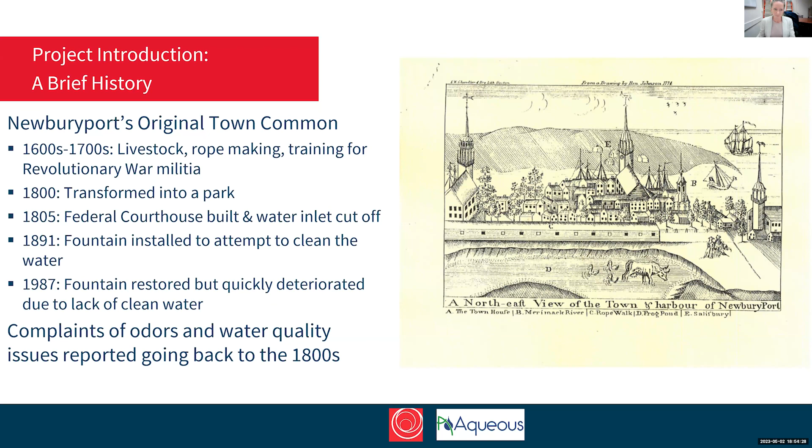In the early 1900s, after the courthouse was constructed, renowned landscape architect Charles Eliot was hired by the city of Newburyport to design the park. He had a sort of overall vision for the park, which included a protective granite edge, meticulously sloped lawn, circulation of the water via the fountain, water and high branch trees that would frame the beauty of the space with no flowering plants of any type. And he also had a vision to complete the northwest corner of the slope.

Some of his vision was realized, but many pieces, including the granite edge and the northwest corner grading, were never fully realized due to the cost. And also the water quality continued to remain a problem, both due to cost and really the lack of technology to remedy the problem of the water quality long-term.

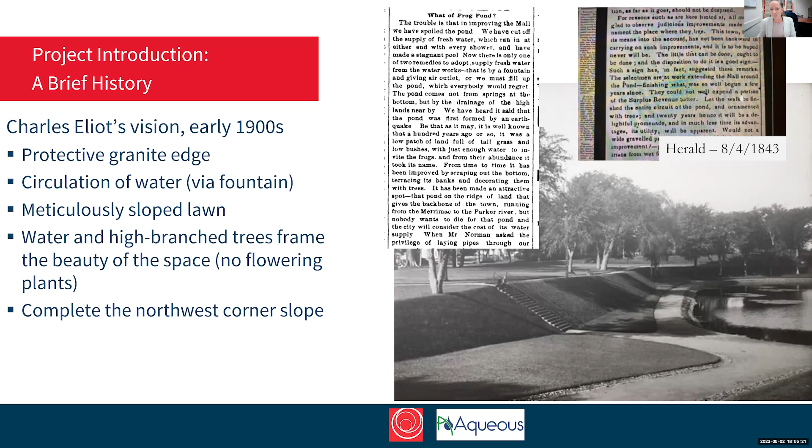Next slide, please. So we're at a really critical moment in this project right now. This is a complex project. It has many pieces that must be carefully orchestrated. This water quality problem demands a unique solution, and we think we have the right team to do that today. We also, for the first time, have funding in place to finally complete this project using bonding against future allocations of the CPA to the tune of almost $3 million.

We have political and public support that are building, and we have a lot of momentum to get this project done. The water quality here is at a critically dangerous ecological point. We've experienced increased harmful algal blooms over the years. We know the pond is stagnant and toxic, and it's certainly not the kind of place that we want to be at the heart of our city. Next slide, please.

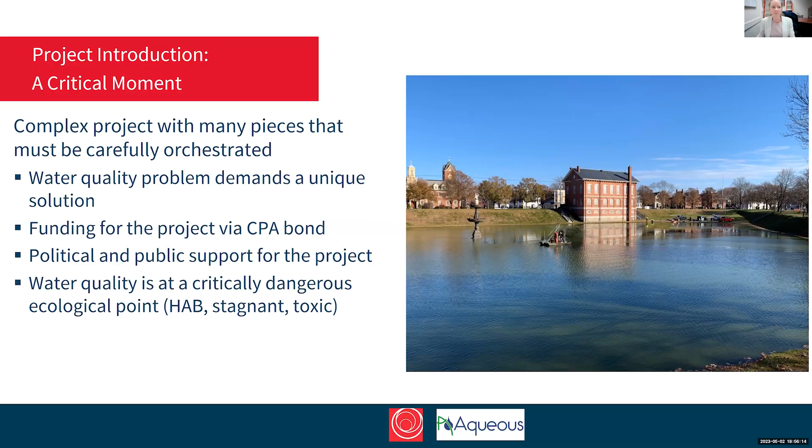And before I pass this off to GEI, I just wanted to put this slide up. I had mentioned earlier that this has been a priority project for the Parks Commission for the better part of a decade. This is the conceptual idea that the commission has for the overall vision of the park. This is not being proposed tonight, but this sort of gives you an idea of what their vision is for maybe down the line.

And so I'll just leave this slide up for a moment if you want to take a quick look, especially at sort of the elliptical boardwalk behind the courthouse. That's not being proposed tonight, but this is something that the Parks Commission has been mulling over.

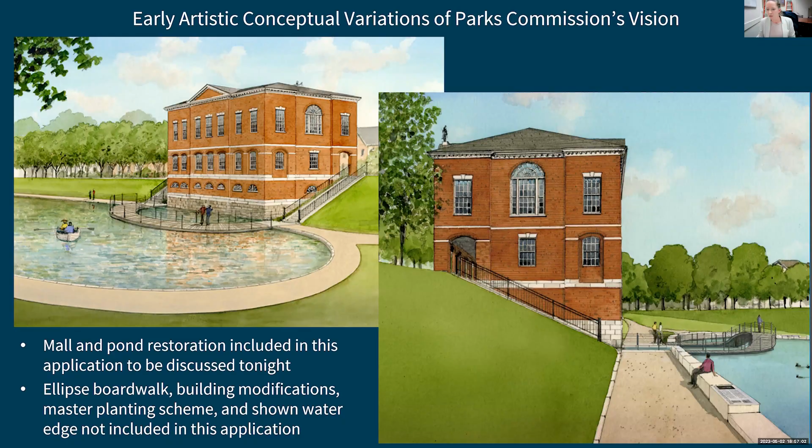And from that, I'm going to turn this over to GEI and Aqueous if you want to change slides, and I'm going to hand it off to Mike Sibilis, I believe. Actually, I'm going to snag it. Oh, sorry, Kim. Krista. Yeah. Sorry about that. No worries.

So as Kim mentioned, I'm Krista Wolf. I'm from GEI Consultants, and over the next handful of slides, I'm going to reiterate the current conditions that Kim described at the pond. I'm going to give a really high-level overview of the proposed restoration that will go into more detail later on, and then discuss how the proposed project is going to be in line with the WPA performance standards.

So just to reiterate, the Mall was modified into a park around 1800, and it's basically been treated as a man-made feature since that time. The pond is currently highly eutrophic, and it has been for approximately 200 years. I'll be discussing further later, but there does not appear to be any connection of the pond water itself to the underlying regional groundwater table.

There are nutrient loads present in sediment to depths of 12 feet below the bottom of the pond. There are also urban type contaminants present in the shallow sediment at the bottom of the pond. And as noted by signs around the perimeter, the water is not currently safe for human contact.

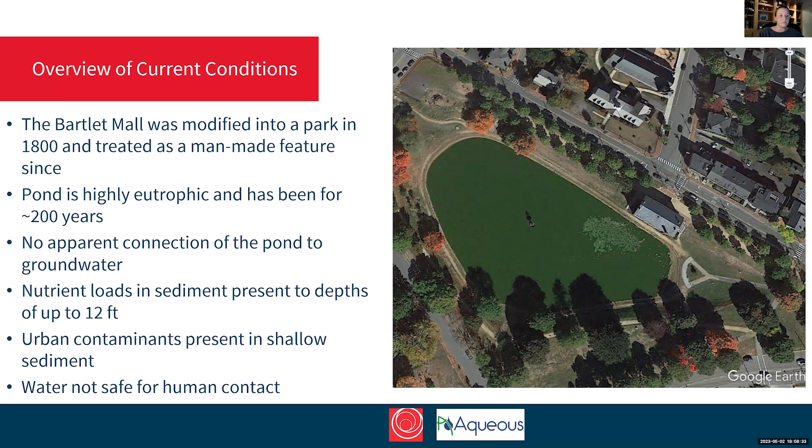So just a high level overview of what the proposed restoration effort entails. There are proposed efforts at the park and proposed efforts at the pond. I'll start with the park. We are including upgrades to the playground area that include ADA compliant equipment. We're proposing upgrades to the park access walkways and paths around the pond. And we're also proposing granite seat height blocks, as Kim mentioned, around the pond perimeter, but above the top of bank.

The pond restoration includes dewatering, treatment, and discharging the existing pond water under the NPDES dewatering and remediation general permit into the storm system. Our proposal includes installation of a liner system, which is made up of a methane system, some geogrid to help the strength of the sediment, an HDPE, high density polyethylene liner, as well as a layer of armor stone and a layer of benthic sediment along the pond bottom, and additionally a vegetated perimeter around the bank of the pond.

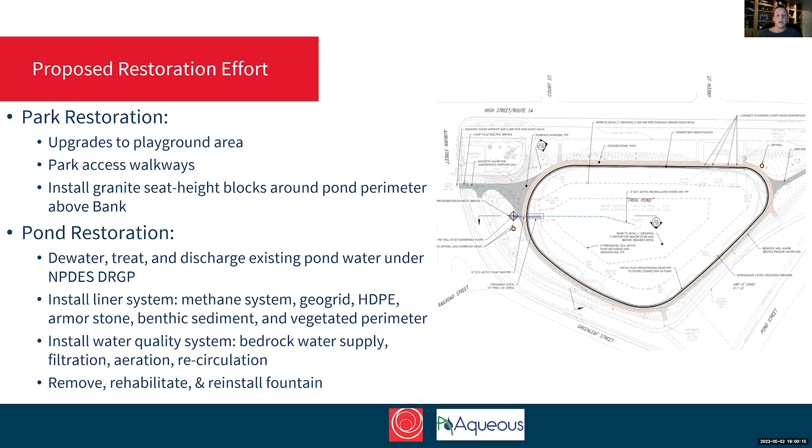It also includes a water quality system, including a bedrock water supply to maintain the water level in the pond, as well as components of filtration, aeration, and recirculation of the water. And lastly, as Kim mentioned, we're also looking at removing, rehabilitating, and reinstalling the fountain.

So just a quick look at how our proposed restoration efforts are going to comply with the Wetlands Protection Act performance standards. These proposed restoration activities do impact the resource areas, but they meet the performance standards. First off, we're proposing to establish best management practices to help minimize any impacts to resource areas to the extent we can.

For the bank resource area, we're planning on restoring the grading and slope conditions to generally match what is existing out there right now. The proposed project would increase the linear feet of bank. And we're also proposing to install that vegetated ring along the bank of the pond, as well as clean benthic sediment along the bottom of the pond to help improve the ecological health.

The second WPA resource area being impacted is land under water bodies and waterways. Similar to bank, we're proposing to restore the grading and slope conditions to generally match what's out there now. And our project also includes an increase of land under water bodies and waterways by about 10,000 square feet. Our proposed effort would provide long-term improvement to water quality and ecological health of the pond by restoring the condition to biomimic a natural pond setting.

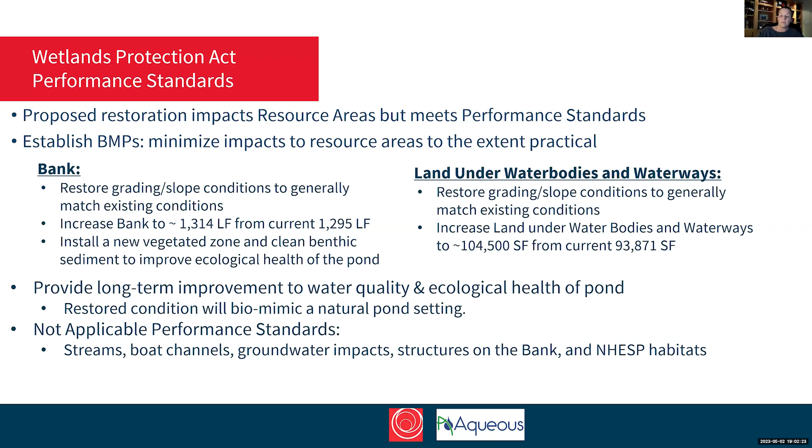I also just want to take a second to reiterate that we included a variance request to the Newburyport Code of Ordinances in the Notice of Intent. As you're aware, this proposed project would include alteration in the bank and land under water bodies and waterways. It would also include alteration in the Newburyport 25-foot no disturbance zone, as well as the 100-foot buffer zone.

But it is our opinion that the proposed restoration effort is in the overriding public interest. It will provide a better recreational space for the public. It will mitigate eutrophic conditions in the pond that are not safe for human contact. And as I mentioned on the previous slide, it will increase the linear feet of bank and the square footage of the land under water bodies.

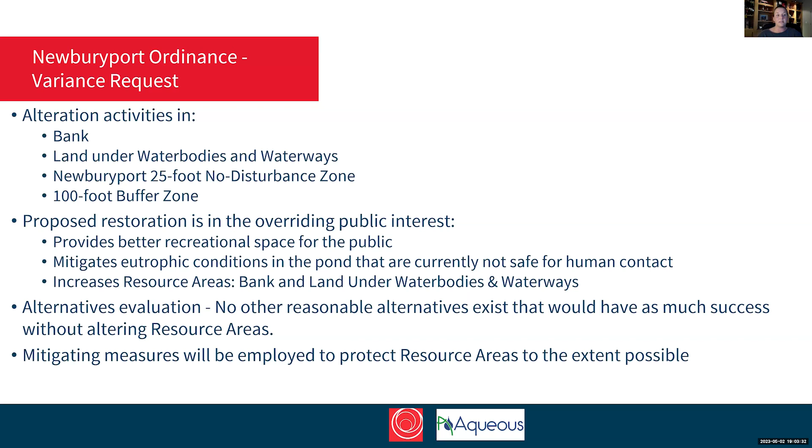My colleague Mike Stibulis will discuss the alternatives evaluation further, but it is our opinion that there were not other reasonable alternatives that exist that would have as much success without altering the resource areas. And as I mentioned, mitigating measures will be employed to protect the resource areas to the extent possible. So that was all included in the variance request in the NOI.

Just a quick plan view of the currently existing jurisdictional areas, both the Wetlands Protection Act and the Newburyport Ordinance jurisdictional areas. Let me see if you guys can see my mouse. No, I don't think so.

The gray towards the center of the pond is the approximate area of the land under water bodies and waterways. The white that's around that is the approximate area of the bank. And then the hatched area is the approximate 25-foot no disturbance zone. And the exterior gray is the approximate 100-foot buffer zone.

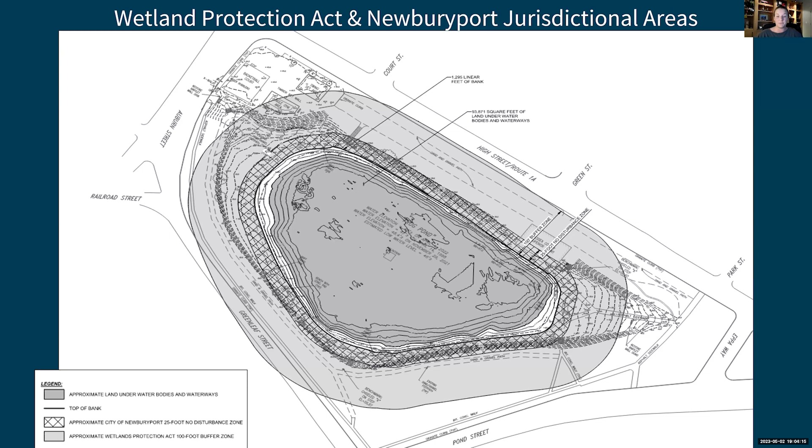And just a quick overview of the investigation that GEI performed back at the end of 2021. We started by reviewing the investigations and data that were collected by other consultants prior to us. We identified some data gaps, and some of you may have seen us out at the Mall at the end of 2021 doing our investigation. And we looked at components of the pond itself, as well as the surrounding area of the pond.

I won't get into the nitty-gritty details, but the key findings were: one, we saw urban contaminants such as metals, petroleum-related contaminants, some semi-volatile organic compounds in that shallow sediment right at the bottom of the pond. We also realized that those analytical results meant that the shallow sediment is not suitable for disposal at a Massachusetts lined landfill. We did see that there was phosphorus, which is the nutrient load, present in up to 12 feet below the bottom of the pond in the sediment.

And as I mentioned, we did not see any hydraulic connection from the pond water to the groundwater. In fact, I'll show you on the next couple slides, the groundwater appears to be about 30 feet below the bottom of the pond. So really, this pond is just surface water contained by low permeability sediment. It's a 4-foot pond, just contained by that sediment in place, not being fed by another water source.

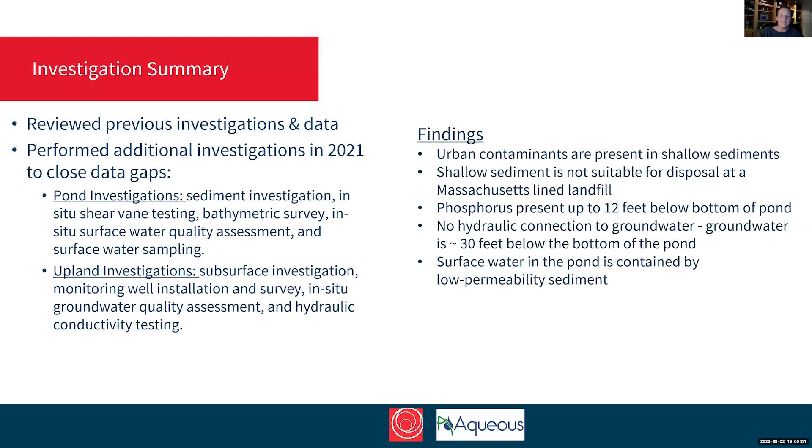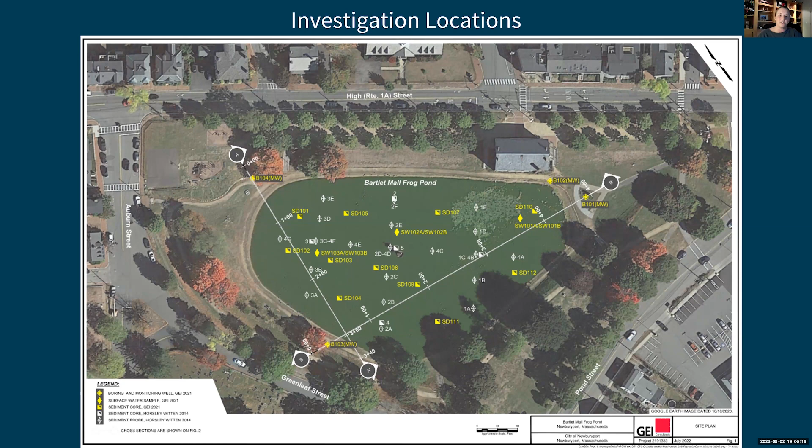So here's a quick plan view of both our investigation locations as well as the previous consultants. Yellow spots are GEI investigation locations from the end of 2021, and the white locations are by Horsley Witten in 2014. And I just want to point out the 2 lines that are on that plan view. On the left is section A and on the right is section B, because this following slide shows these 2 sections, the top A, the bottom B.

As you can see, there's monitoring wells on the left and right sides of both of those sections. And that's where we're able to measure the depth to groundwater right at the outer perimeter of the pond. The pond water is indicated by the gray area, and the groundwater table is the dotted line that's approximately 30 feet below the bottom of the pond. So we really did not observe any connection to the regional groundwater table.

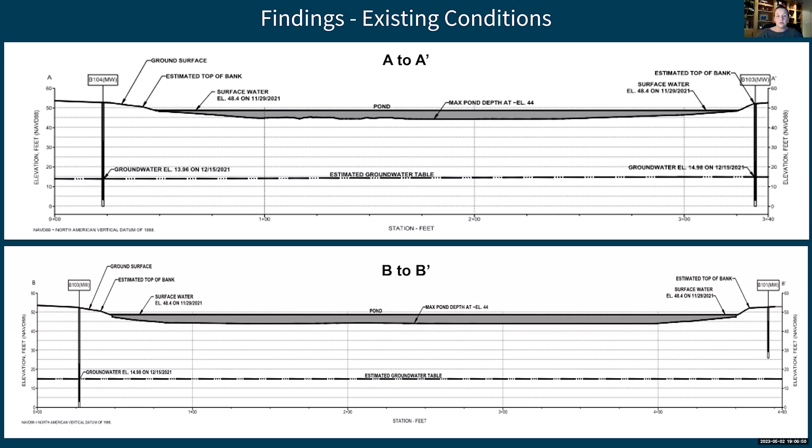From here, I am going to pass it to my colleague, Mike Sabulis, who's going to talk about the alternative and feasibility analyses and then get into some more details of the proposed restoration.

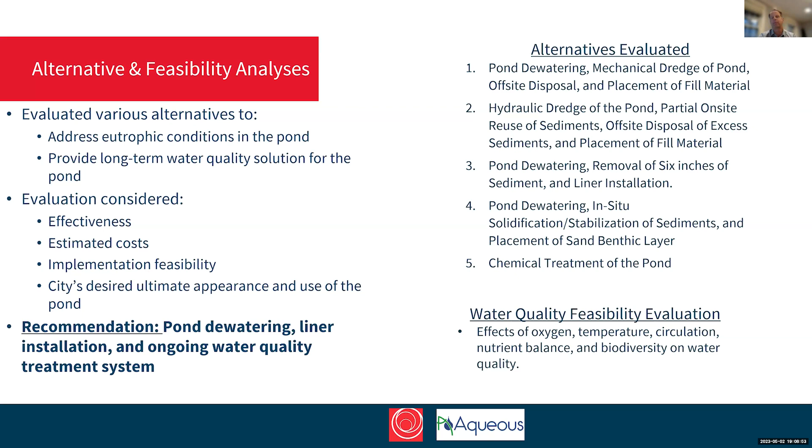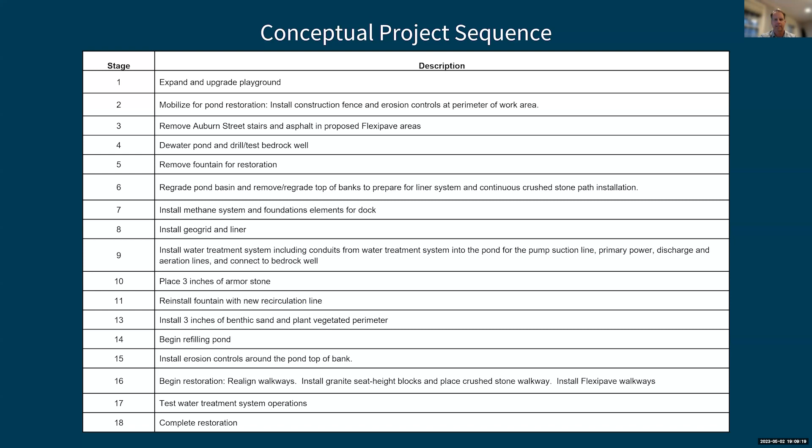Next slide, please, Krista. So this is our conceptual project sequence. It was included in the NOI package. I'm not going to spend a lot of time here, but it's important to note how the sequence we envision might change as the contractor is selected and see how they most efficiently might engage this. But it plays into the following slides, which talk about our project setup, working through the actual liner installation, and then wrapping up with the water treatment system.

That will be done, as Krista mentioned, in accordance with the NPDES dewatering remediation general permit that was just released, which will allow us to treat that water and discharge it to surface water through storm drain systems in the city, which will ultimately discharge to the Merrimack. So we will have influent and effluent testing of that water to make sure we're in compliance and meet surface water quality standards for the Merrimack River. Next slide, please.

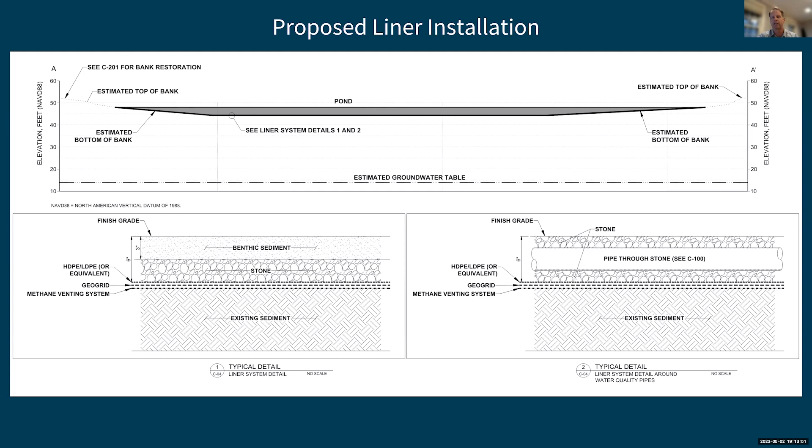What you'll also see in here is a typical detail for our water quality pipes. That's our typical diagram to the right of the page. That is going to be strictly through stone, and that is to facilitate aeration and water circulation without encumbering the water lines. This will be slotted pipe, and again, Mike and Ashley will get into that in a minute. But those areas will be strictly stone to the surface, although limited in nature. But again, important to maintain that circulation and aeration through the pond for the long-term maintenance.

Kristen, next slide, please. And at this time, I'm going to pass it over to our colleagues at Aqueous, Mike and Ashley, and they're going to talk a little bit more about the water treatment, water quality system that is going to be in place once we refill the pond after the liner is installed. Right. Thank you for your time.

Thanks, Mike. Mike Igo, Aqueous Consultants, Andover, Massachusetts. Ashley Hammond is my colleague. She's off camera, but she's here as well. We're both professional engineers that specialize in water systems all around the country. So for this project, we've been working with GEI for a number of years. And we actually had a similar project that we were working on together, which ended up with us working on this project. So as Mike and Krista mentioned, and Kim as well, there's a rich history here of this being more of a water feature and more of a man-made system rather than a natural pond.

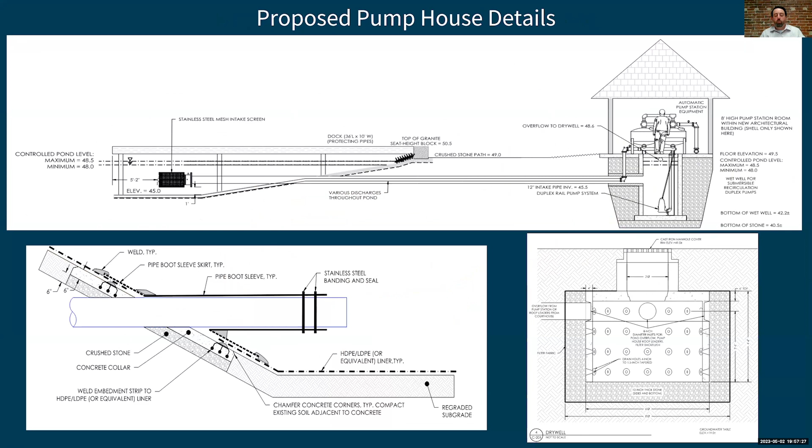So is it going to get filtered through the sand or the granular material around it? I mean, how are you going to discharge it? I don't quite get a good feel of what the intent is here. Yeah, so again, those are details that we're still working on as far as what the cross section of that path looks like. The intent would be that anything that flows off of the bank would flow to the edge of the path itself, and then go downwards in a micro swale or something that can collect water from the bank itself.

But the intent would be to grade basically anything going right of this page here. So what we still are working on at this point, if we have the bank here, what you're saying is basically we need to work out what this looks like over here.

But my intent, or our intent for this, is to make the pond as much of a closed system as possible from any runoff. So if that means we have to infiltrate at the base of the crushed stone path itself, then that would probably be the best bet for that, so that we don't have that runoff from the slopes themselves going into the pond directly.

So you're just assuming it's going to go downward and then into your layers here and not go into the pond, because you're not going to pump it away. It's not going to drain away. It's kind of in the hole. Correct. Right, and the intent would be that any water that comes from the slope itself would find a path of infiltration at the interface between the slope itself and the surrounding grading, and any surrounding areas with the crushed stone path itself. So yeah, and I guess details on that would be helpful so we can understand that better.

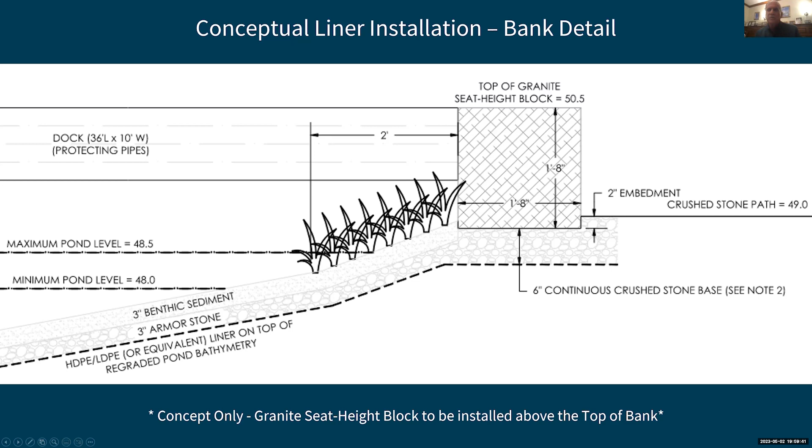Okay. And just the last thing I wanted to ask, others have questions, I'm sure. How is this going to impact the public during construction? Where's the construction fence going to be? Are people still going to be able to use that sidewalk? Are we going to be near Yankee Homecoming time and things are going to be closed down? Because that is a pretty well-used area there throughout the year.

Yeah, so to speak to that a little bit, I think our intent was our construction fence would be outside of our erosion control. So that dashed line, we'd be leaving as many walkways open as we could while limiting access into the pond. Okay, so they'd still be able to use the sidewalk and so forth, but you wouldn't make it all the way across. You'd have to cross the street during all this construction if you were walking down that way.

I think that's one of those things we need to work with the contractor on. We're showing maximum approval for maximum staging access. The best staging that we could find is probably right there next to Eppa Way, where we're outside of the buffer zone. Certainly that is a flexible situation, so if we needed to maintain pedestrian access to certain areas at certain times, please let us know where we should be doing that.

The other thing to note here too is that the start to end construction of this is fairly fast. So while we understand it will be inconvenient to not be able to use the park for a short period of time, I think we're only looking at what, 2 to 3 months tops here. Yeah, right. I think even if we could say 3 to 4, that's kind of the window we're looking at. And it would be well after Yankee Homecoming, so that will not be impacted during that time.

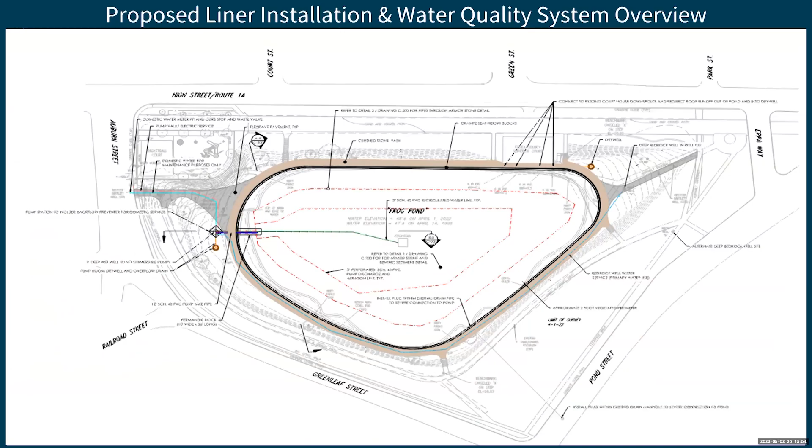All right, Julie, go ahead. Okay, this isn't gonna be very organized, but I'm just gonna try to run through questions that I heard. I have a couple questions to throw in along the way, just so we can get a good picture of the information that has been requested.

So first thing I have is related to the wildlife migration during dewatering. Is there a plan for that? Where are they gonna go? I know you said that you're sort of developing a plan for that, or you think that they might be able to migrate, but I think we need a plan that looks at that and says where you think they're gonna migrate, where will they go? And if they're not going anywhere, we don't want them getting hit by cars and things like that, turtles and whatnot.

So would there be a backup plan for where you would take them? Something like that. We've seen that at Flowering Pond down at Maudslay. So something like that would be helpful. Construction-based wildlife management. A question about the dock and public safety. Will there be railings? Will it come out in the winter? Will it stay in permanently? Questions about the dock.

Subsurface aeration. You said that you're considering adding some sort of O2 or ozone generation into the system within the return pipes. But my question is, is that included in this design already, or is that something that you're thinking about putting into the design that's not already there? So we might need a little bit more information on that subsurface aeration component.

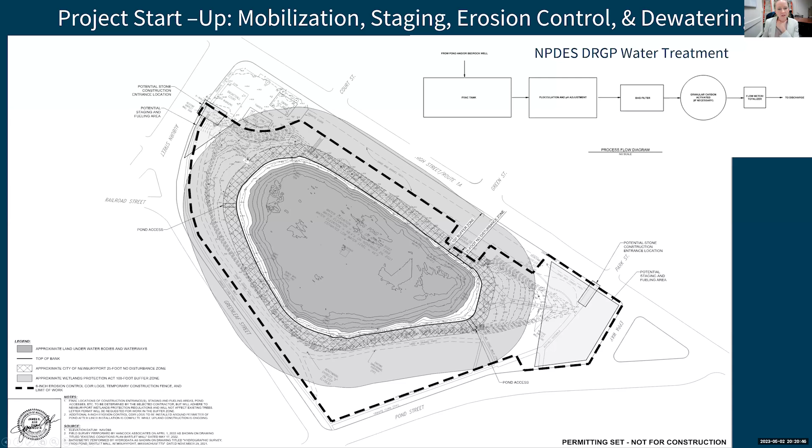Yeah, it was just installed along Pond Street last year. It's that rubberized surface. It's totally pervious. So if you walk from the CVS along Pond Street, it's that new walkway. Got it. Okay, perfect. That's what I need to know. Okay. That's all that I heard that I wrote down. Did anybody else have anything?

Sure, here's a tip on the bedrock groundwater wells. Can we get any water quality information from all the other bedrock wells in the area? I know you guys identified where they were, but to find out about carbon dioxide, oxygen, and temperature especially, that might be just readily available.

Yeah, it's a good point. We can identify and research again and see what information is available at those bedrock wells, so that we can examine that a little bit more. I think that's fair, to see what clues or indicators exist in the surrounding bedrock wells. So I think that's fair for us to at least gain a preview of what may come out of the well that we're proposing. Okay.

And we didn't mention, how many pond turnovers are anticipated per year? Yeah, so part of our means of scaling the system back is, at one point we had a very high flow turnover. But where we're at right now is we don't want a swimming pool. So we're not turning this pond over 4 times a day or anything like that. Based on the flow rates we have right now, we're looking at about 1 turnover per week.

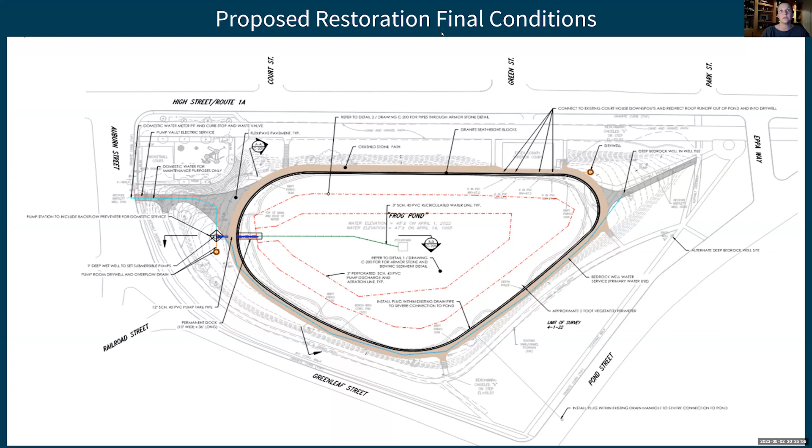Do we have anything else? Anybody else? You want me to release the screen so that you can have it back, Julia? Sure, I don't know if you have to go back to your agenda. We actually don't have anything else on the agenda, but that's fine. Yeah, okay, you guys are all we have tonight on the agenda. I'll just put the agenda back up. And let's say I'm glad for that. Okay, yeah. Great presentation. Thank you.

Yep, that was good. So when would you like to have another meeting? You want to go to the next meeting? Assuming, well, in either case, we can always continue to another meeting if you're not ready, but what would you prefer? I'm going to look to the team, but do we think we would have some of these answers in 2 weeks, or do we want to say 4 weeks? Would it be possible for us to have a debrief and get back to you guys on that, or do you need to know tonight if we're on the agenda?

Well, we can simply continue to the next meeting, and at the next meeting continue past if necessary. Right. You can always let us know, and we can just continue without. That would be my suggestion if the team's on board, to keep us on the agenda if that's amenable to everybody. Yeah, I agree. All right, so can I get a motion to continue this to the 16th?